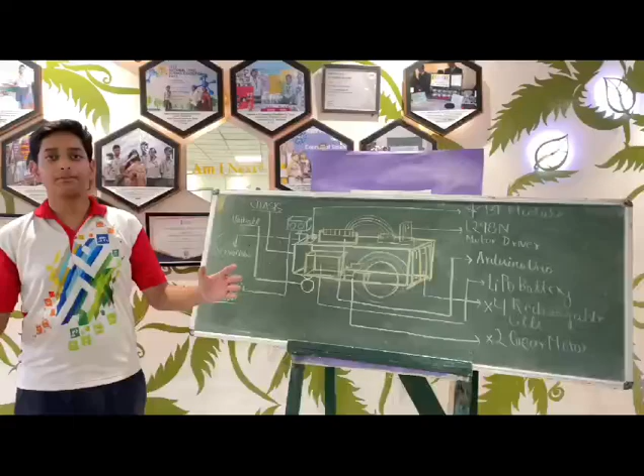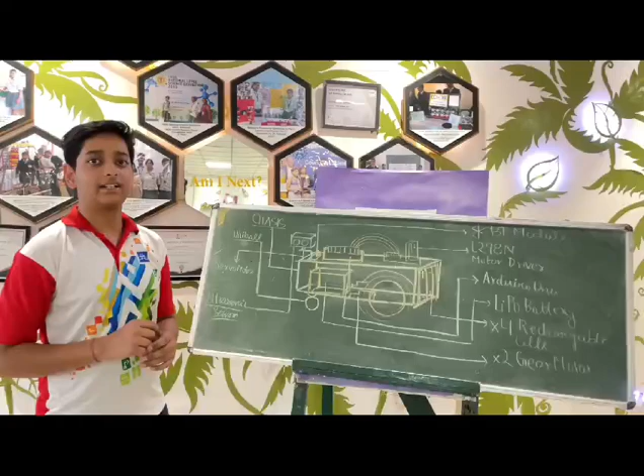I am Aditya Tripathi of class 11th of DLR Public School, and today I am going to share a little about my project AutoNav. AutoNav is a Bluetooth enabled obstacle avoidance car, a car that you can easily control through your mobile or Android device via Bluetooth, and it has automatic obstacle avoidance so that if anything comes in its way, it can automatically deflect and move to a new safer path.

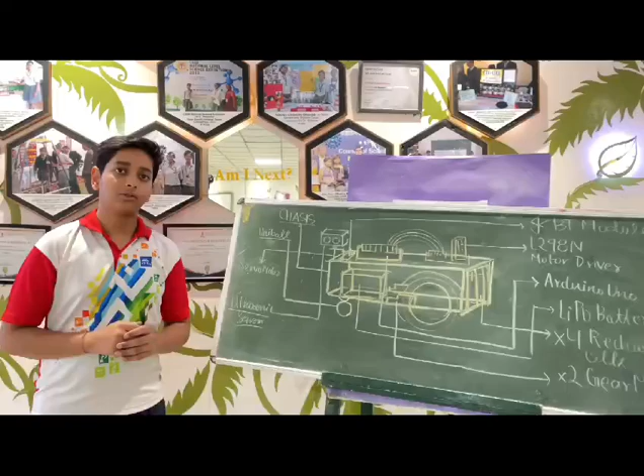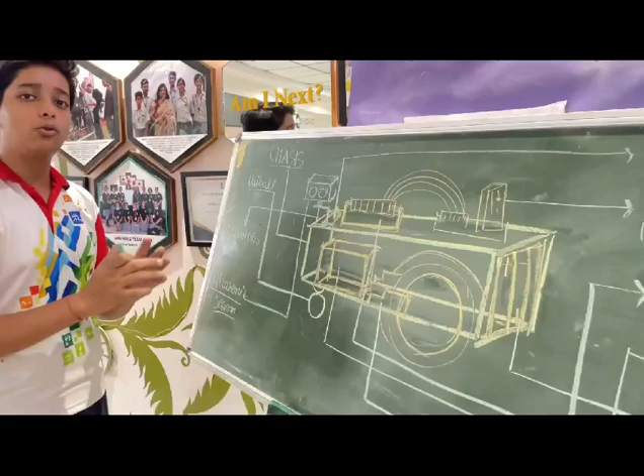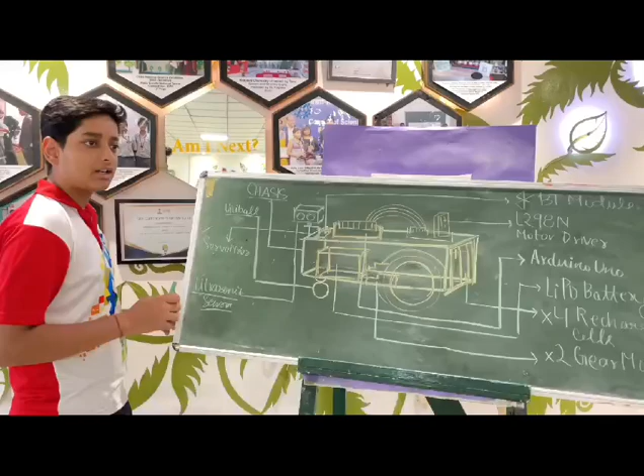Now I am going to share a little about how I made the project and what components are being used. First of all, the most important is the chassis that holds everything together, along with a couple of wheels hooked to the gear motors and a uniball that allows for free movement and a two-wheel drive robot. That is especially useful when you don't have a lot of power but still want the same speed you would get from a four-wheel drive.

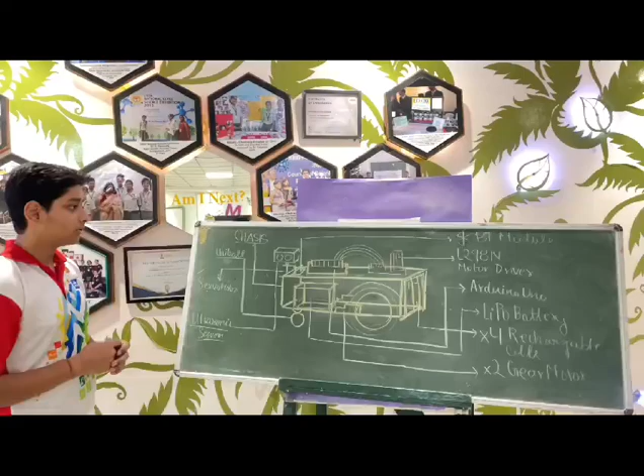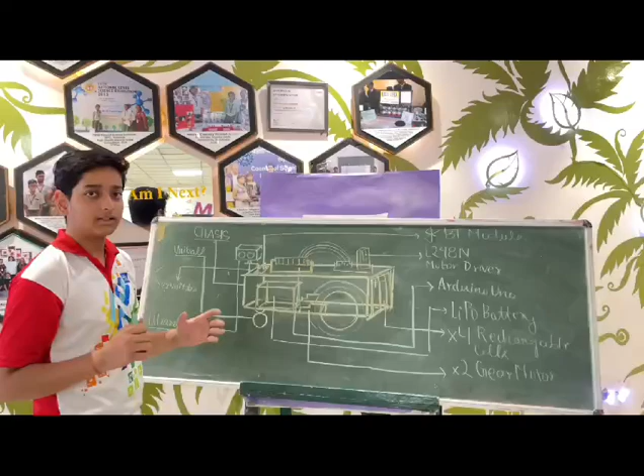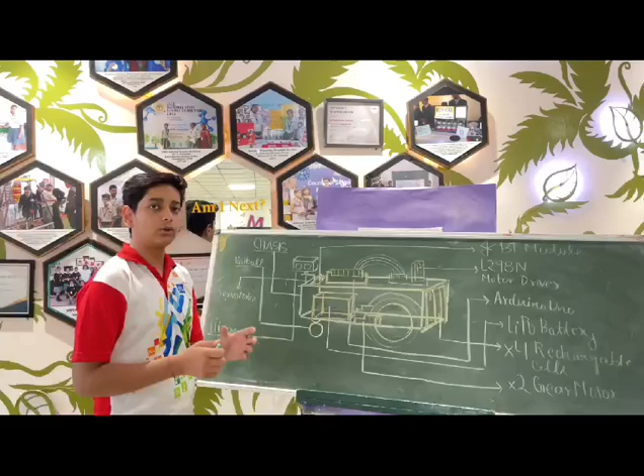Now coming to the most important part of the project, the main brain of the project. It is the Arduino Uno that is running the code written in C++ and is running the main car. It is hooked with a Bluetooth module, so that the person would be able to control the car anywhere just through their phone or mobile device.

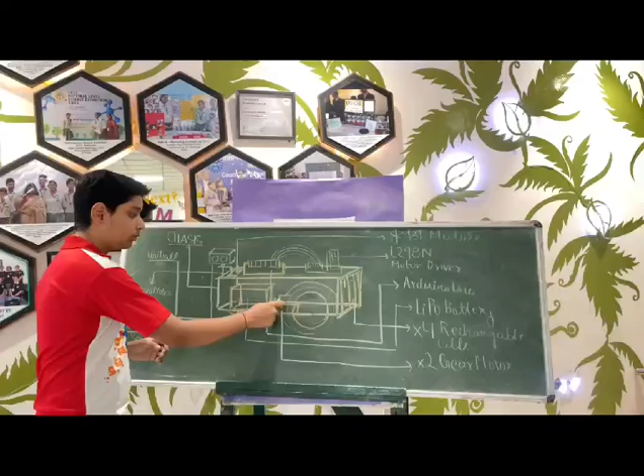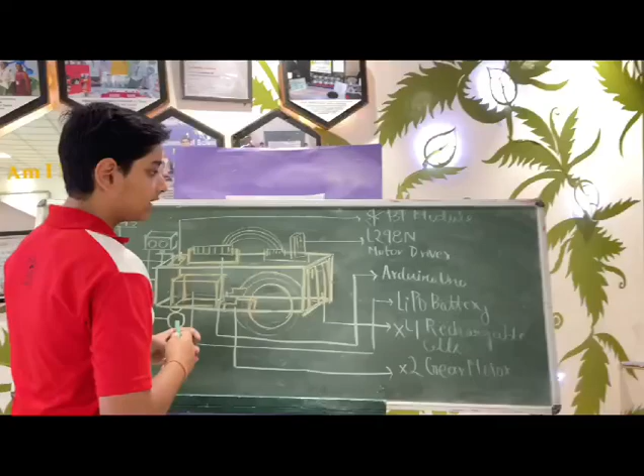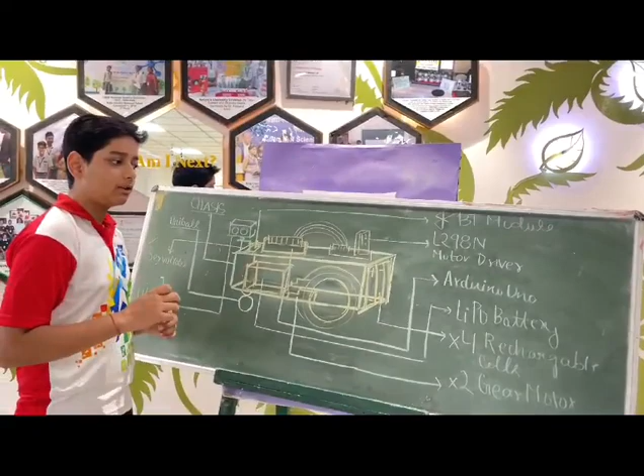It is hooked with an L298N motor driver that is running the two gear hobby motors which have the wheels, so it is facilitating the two-wheel drive function of the robot. They are all connected to the LiPo battery and 4 rechargeable cells. The LiPo battery is useful when you have to run two big motors for a long time, so we are using a lithium polymer battery, and for the Arduino that requires a little less power, we are using 4 rechargeable 1.4 volt cells.

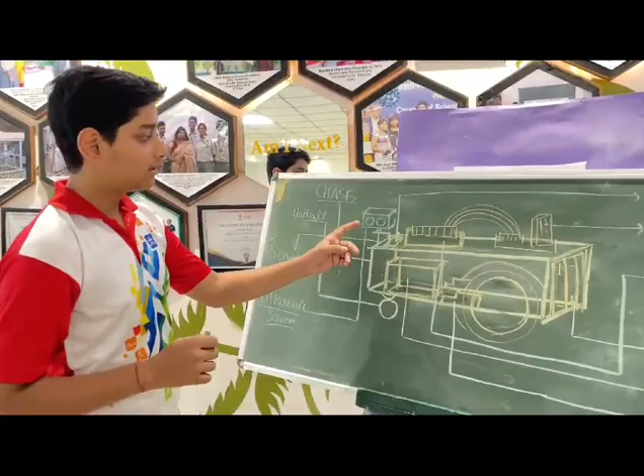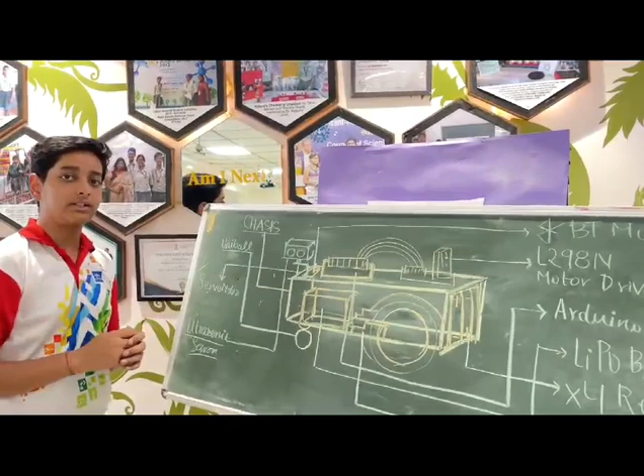And the most important component is the ultrasonic sensor. The ultrasonic sensor is mounted on a servo motor that is connected so that whenever the ultrasonic sensor detects anything in a range between 0 to 15 centimeters, it will automatically detect that something is in my path and I need to move away.

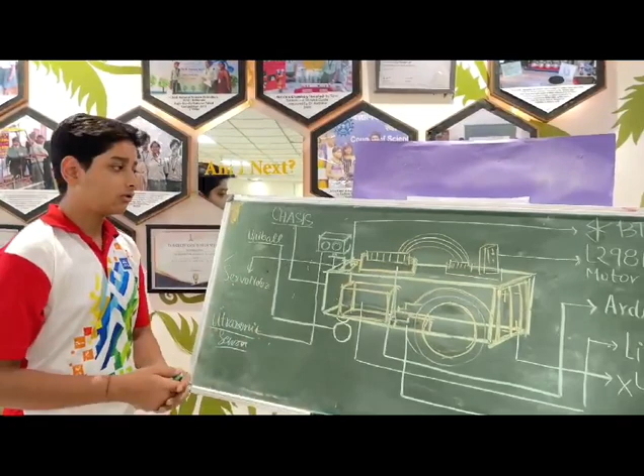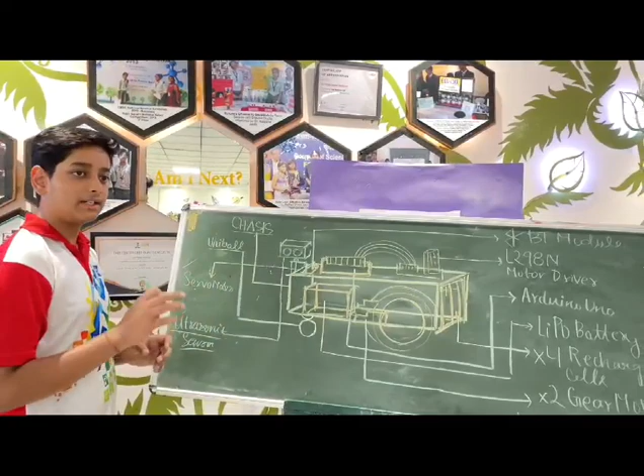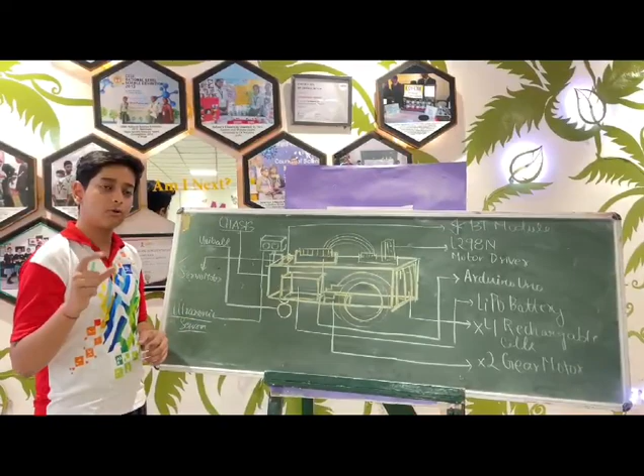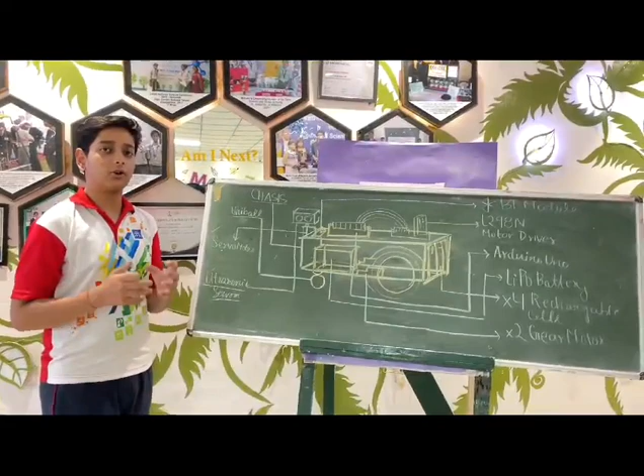But if the ultrasonic sensor was fixed in one position, it wouldn't know where the safe path is. So we mounted it on a servo motor so that whenever it detects something in its way, it would automatically move over, like we move our heads, to find a new path. Wherever there is no obstacle detected under 15 to 20 centimeters, the car would automatically move to that path and continue, facilitating a little autonomous vehicle mode, something I like to call a Tesla, something that Tesla has, but not exactly.

So this was our project, AutoNav.